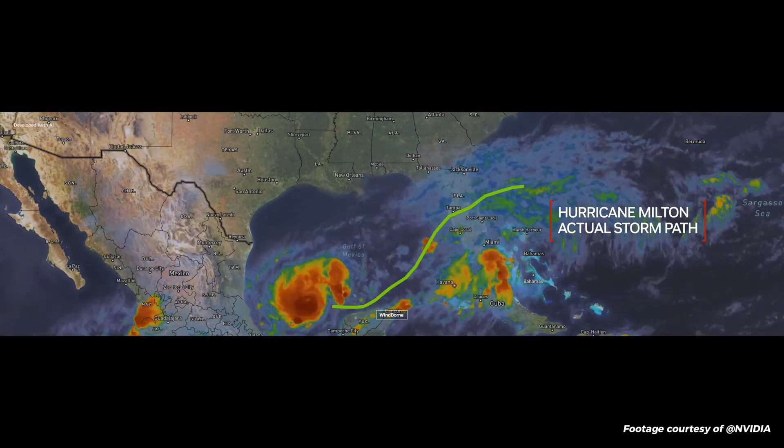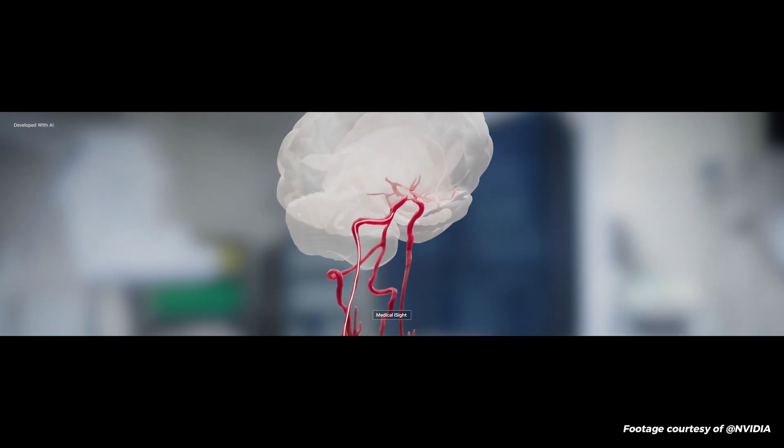Tokens can bring our visions to life. And restore what we've lost. Zachary, I got my voice back, buddy. They help us move forward. One small step at a time. And one giant leap. Together. And here is where it all begins.

That was pretty remarkable, right? Nvidia have their hands on pretty much all aspects of our life. They worked on autonomous driving with Tesla and other companies. They also work in healthcare, weather predictions, hurricane predictions, and also companion robots and robotic arms that can cook for us. Everything involves Nvidia.

For business owners and entrepreneurs, what do we care about? We care about optimization, our workflow. We care about revenue growth. So what's better than an AI agent to help us do that, right? 2022 was the first time that the world saw ChatGPT and knew what it can do. Then 2023 was the year that AI exploded. I remember about 300 to 400 tools that came out every single month. Everything on my Twitter feed was about a new tool with AI infused, AI powered.

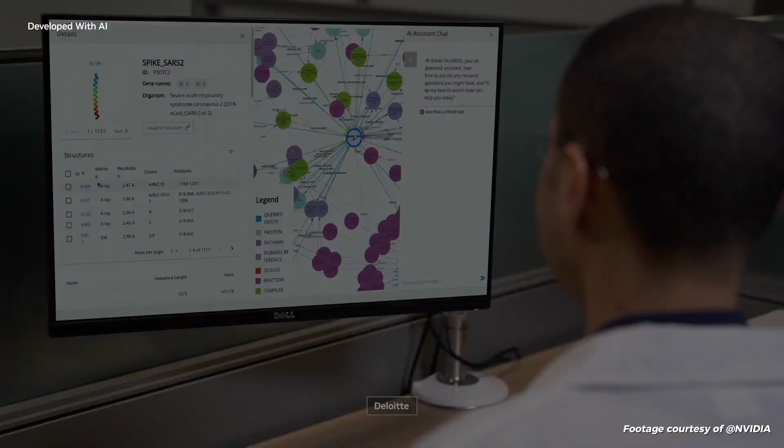Virtual Lab AI agents help researchers design and screen billions of compounds to find promising drug candidates faster than ever. And video analytics AI agents, built on an NVIDIA Metropolis blueprint, including NVIDIA Cosmos Nemotron vision language models, Llama Nemotron LLMs, and NeMo Retriever. Metropolis agents analyze content from the billions of cameras generating 100,000 petabytes of video per day. They enable interactive search, summarization, and automated reporting,

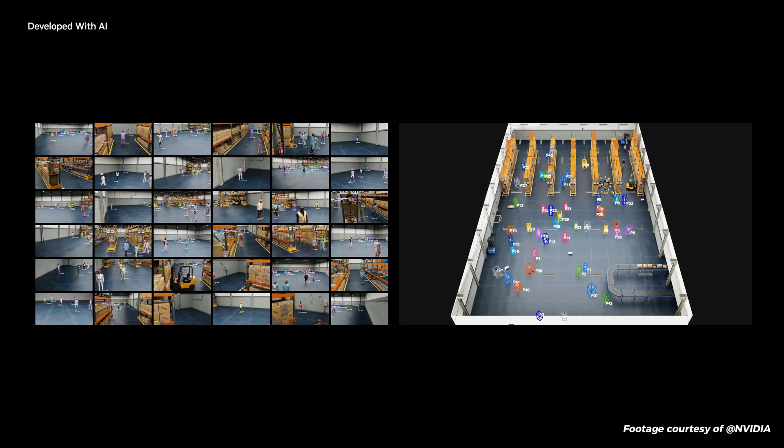and help monitor traffic flows, flagging congestion or danger. In industrial facilities, they monitor processes and generate recommendations for improvement. Metropolis agents centralize data from hundreds of cameras and can reroute workers or robots when incidents occur. The age of agentic AI is here, for every organization.

Okay. That was the first pitch at a baseball game. That was not generated. I just felt that none of you were impressed.

Okay, so AI was created in the cloud and for the cloud. And for enjoying AI on phones, of course, it's perfect. Very, very soon, we're going to have a continuous AI that's going to be with you. And when you use those Meta glasses, you could, of course, point at something, look at something, and ask it whatever information you want. And so AI is perfect in the cloud. It was created in the cloud, is perfect in the cloud.

I know what you may be thinking. The people who are knowledge workers, people who work in corporate America, they are in danger. The reason is because, as you just saw, when you apply an agentic AI workflow like the one from NVIDIA and you combine it with a model that can reason like ChatGPT o1, the agents become so powerful and they can perform tasks. They can do better work than a lot of us. And the crazy thing is, they don't sleep, they don't need to eat, they don't take sick days.

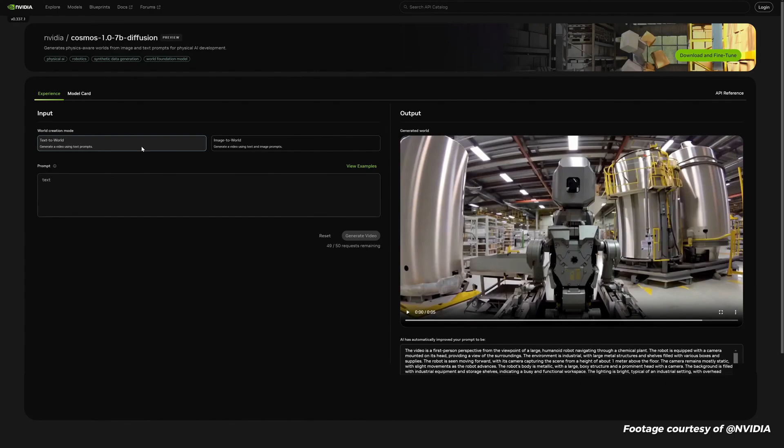The next frontier of AI is physical AI. Model performance is directly related to data availability, but physical world data is costly to capture, curate, and label. Nvidia Cosmos is a world foundation model development platform to advance physical AI. It includes auto-regressive world foundation models, diffusion-based world foundation models, advanced tokenizers, and an Nvidia CUDA AI-accelerated data pipeline. Cosmos models ingest text, image, or video prompts and generate virtual world states as videos. Cosmos generations prioritize the unique requirements of AV and robotics use cases, like real-world environments, lighting, and object permanence.

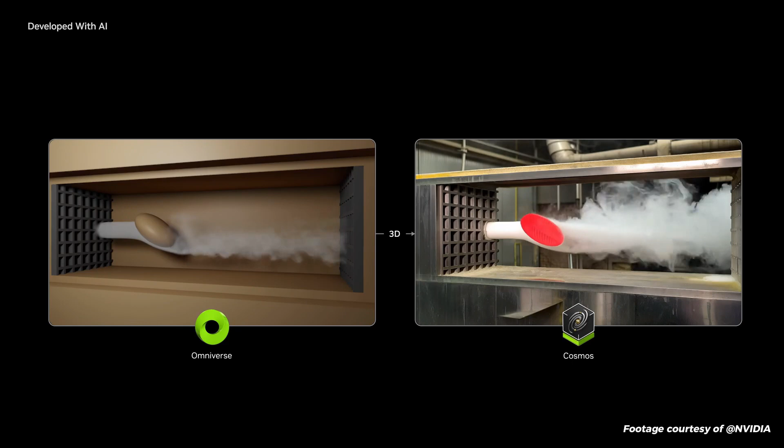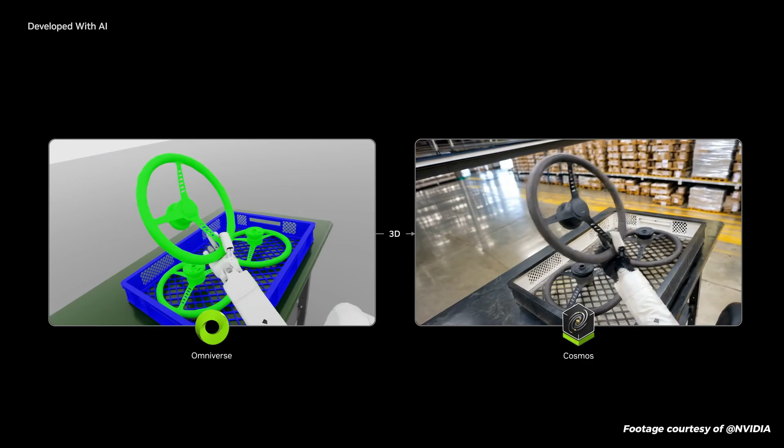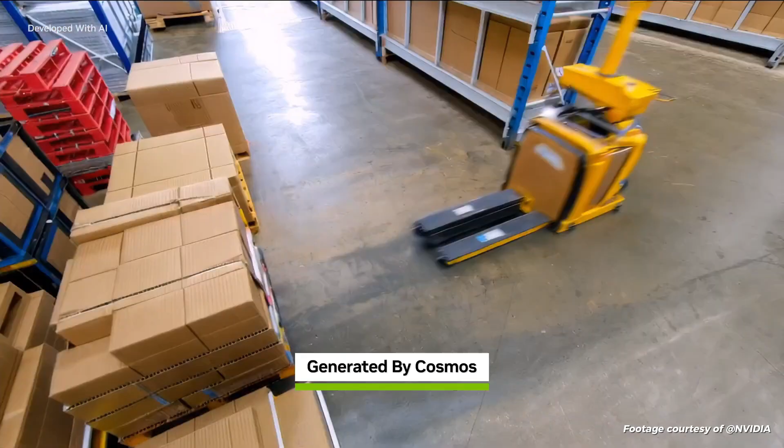Developers use Nvidia Omniverse to build physics-based, geospatially accurate scenarios, then output Omniverse renders into Cosmos, which generates photoreal, physically based synthetic data. Whether diverse objects or environments, conditions like weather or time of day, or edge case scenarios. Developers use Cosmos to generate worlds for reinforcement learning AI feedback to improve policy models, or to test and validate model performance. Even across multi-sensor views, Cosmos can generate tokens in real time, bringing the power of foresight and multiverse simulation to AI models, generating every possible future to help the model select the right path. Working with the world's developer ecosystem, Nvidia is helping advance the next wave of physical AI. Nvidia Cosmos.

Nvidia Cosmos. Now that you have seen Nvidia's Cosmos, how they actually create synthetic data to train physical AI, now let's take a look at the fun part. How people are actually using Cosmos in the real world, in the physical AI robotic world.

With this physical AI, there are many downstream things that we could do as a result. We could do synthetic data generation to train models. We could distill it and turn it into effectively the beginnings of a robotics model. You could have it generate multiple physically based, physically plausible scenarios of the future, basically do a Doctor Strange.

Because this model understands the physical world, of course, you saw a whole bunch of images generated. This model understanding the physical world, it also could do, of course, captioning. And so it could take videos, caption them incredibly well, and that captioning and the video could be used to train large language models, multimodality large language models.

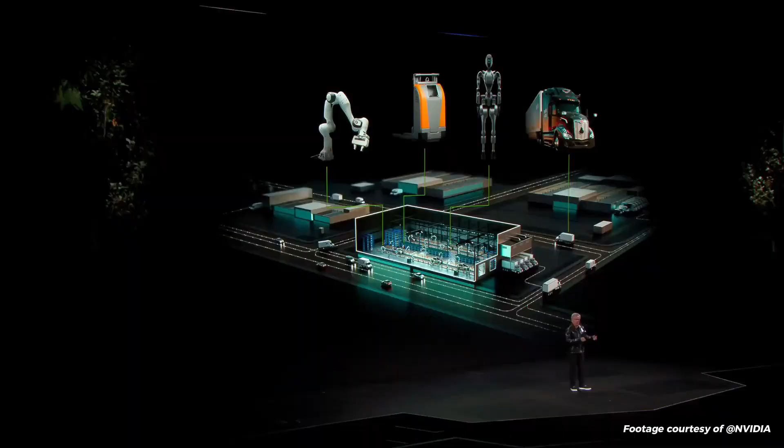All right, so the first example is how we apply all of this to industrial digitalization. There are millions of factories, hundreds of thousands of warehouses. That's basically the backbone of a $50 trillion manufacturing industry. All of that has to become software defined. All of it has to have automation in the future. And all of it will be infused with robotics.

Well, we're partnering with KION, the world's leading warehouse automation solutions provider, and Accenture, the world's largest professional services provider, and they have a big focus in digital manufacturing. And we're working together to create something that's really special. And I'll show you that in a second. But our go-to-market is essentially the same as all of the other software platforms and all the technology platforms that we have through the developers and ecosystem partners.

And we have just a growing number of ecosystem partners connecting to Omniverse. And the reason for that is very clear. Everybody wants to digitalize the future of industries. There's so much waste, so much opportunity for automation in that $50 trillion of the world's GDP. So let's take a look at that. This one example that we're doing with KION and Accenture.

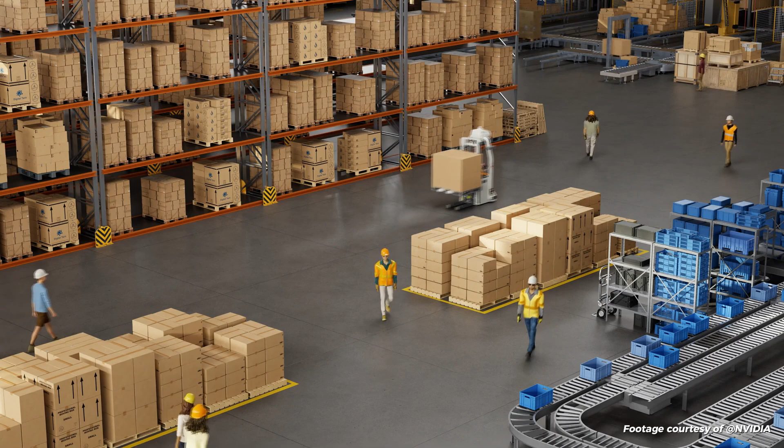Kion, the supply chain solution company, Accenture, a global leader in professional services, and Nvidia are bringing physical AI to the $1 trillion warehouse and distribution center market. Managing high-performance warehouse logistics involves navigating a complex web of decisions influenced by constantly shifting variables. These include daily and seasonal demand changes, space constraints, workforce availability, and the integration of diverse robotic and automated systems. And predicting operational KPIs of a physical warehouse is nearly impossible today.

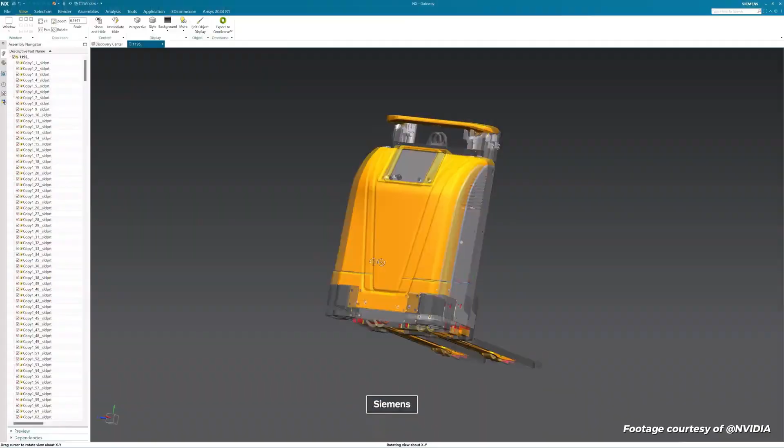To tackle these challenges, Kion is adopting Mega, an Nvidia Omniverse blueprint for building industrial digital twins to test and optimize robotic fleets. First, Kion's warehouse management solution assigns tasks to the industrial AI brains in the digital twin, such as moving a load from a buffer location to a shuttle storage solution. The robot's brains are in a simulation of a physical warehouse, digitalized into Omniverse using OpenUSD connectors to aggregate CAD, video and image to 3D, LiDAR to point cloud, and AI-generated data.

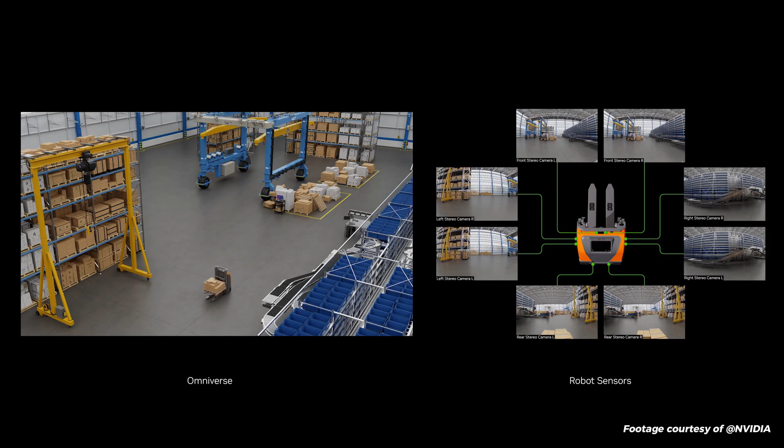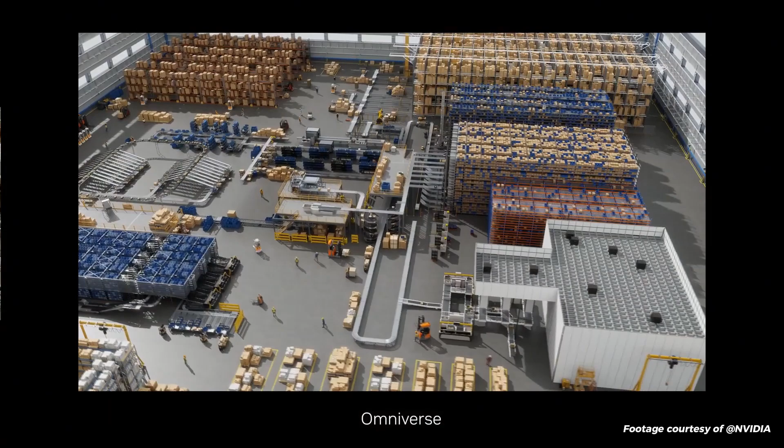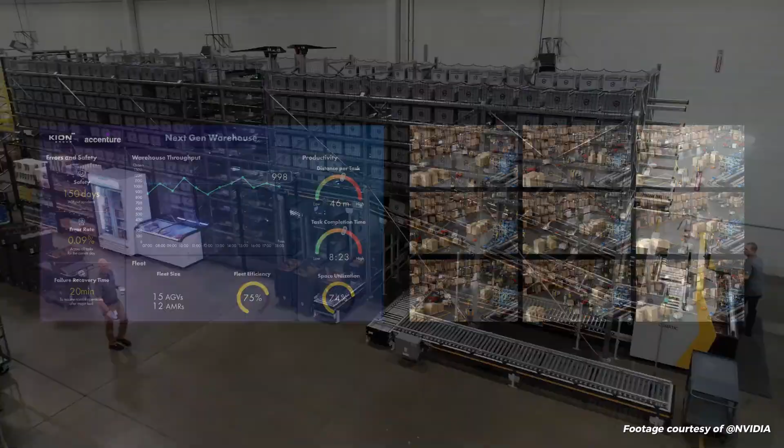The fleet of robots execute tasks by perceiving and reasoning about their Omniverse digital twin environment, planning their next motion and acting. The robot brains can see the resulting state through sensor simulations and decide their next action. The loop continues while Mega precisely tracks the state of everything in the digital twin. Now, Kion can simulate infinite scenarios at scale while measuring operational KPIs, such as throughput, efficiency, and utilization, all before deploying changes to the physical warehouse. Together with Nvidia, Kion and Accenture are reinventing industrial autonomy.

So that's how Nvidia is using physical AI to tackle automation and robotics in the manufacturing and warehouse industries. Like you heard Jensen Huang say, it's a $50 trillion, with a T, manufacturing industry. And they're using their system to train robots, to create synthetic data, and then use that data to train large language models. It's just fascinating the things that they are doing right now at Nvidia.

Now, for a small business owner and entrepreneur, how does this really apply to you? Just like ChatGPT when they first came out, if you wanted to use the API, it was really expensive. Even before ChatGPT came out, Jasper AI was really expensive. It was using GPT-3. And then eventually, when they have more computing power, more training, it's cheaper and cheaper to use their API.

Now take that and turn it to the physical AI world, right? Right now, maybe it's still early, it's expensive, but eventually, if you have a small warehouse and you're doing e-commerce, maybe you can have some of these robots working for you autonomously. Just imagine that, right? In the industrial setting. Or like Tesla's Humanoid. This is a good time to transition over and talk about robotics.

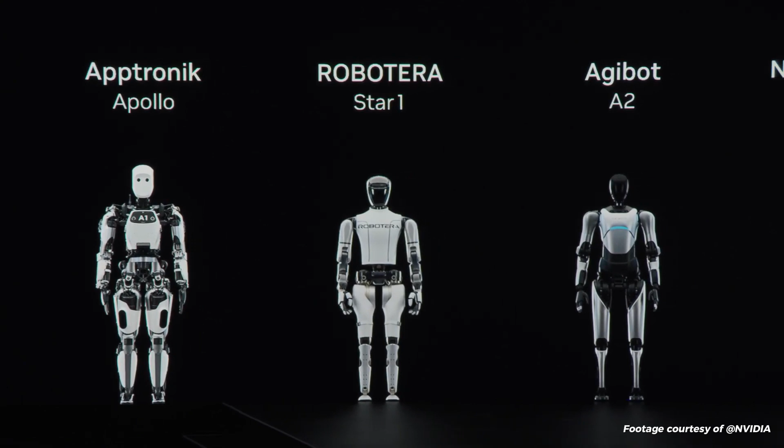Humanoid robots. My friends, the ChatGPT moment for general robotics is just around the corner. And in fact, all of the enabling technologies that I've been talking about is going to make it possible for us in the next several years to see very rapid breakthroughs, surprising breakthroughs in general robotics. Now, the reason why general robotics is so important is whereas robots with tracks and wheels require special environments to accommodate them, there are three robots in the world that we can make that require no green fields. Brownfield adaptation is perfect. If we could possibly build these amazing robots, we could deploy them in exactly the world that we've built for ourselves.

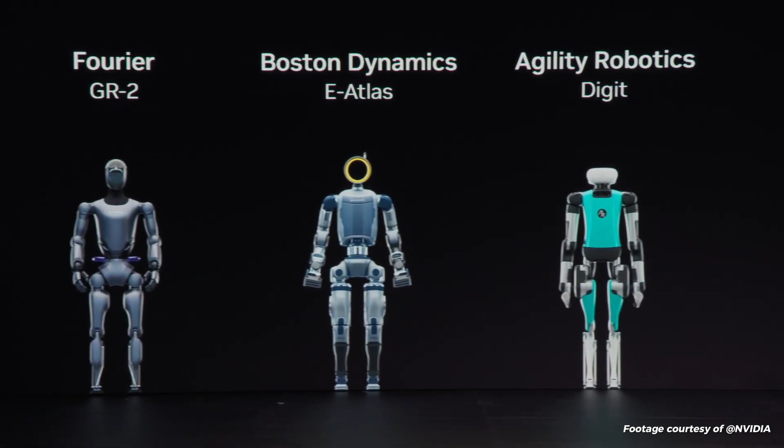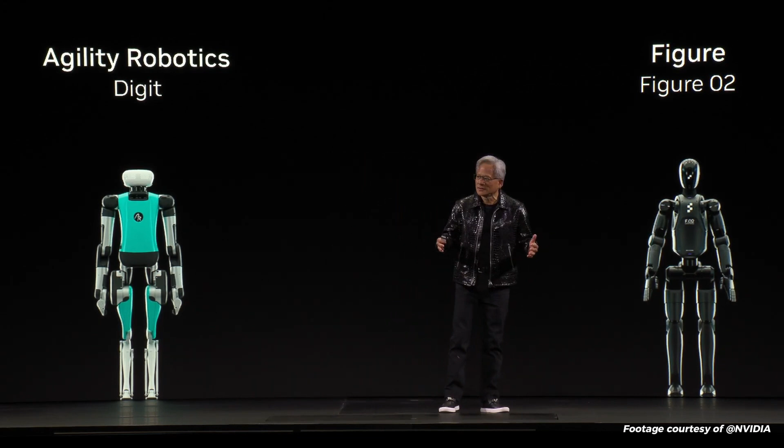These three robots are, one, agentic robots and agentic AI, because they're information workers. So long as they could accommodate the computers that we have in our offices, it's going to be great. Number two, self-driving cars. And the reason for that is we spent 100 plus years building roads and cities. And then number three, humanoid robots. If we have the technology to solve these three, this will be the largest technology industry the world's ever seen. And so we think that the robotics era is just around the corner. The critical capability is how to train these robots.

In the case of humanoid robots, the imitation information is rather hard to collect. And the reason for that is, in the case of car, you just drive it. We're driving cars all the time. In the case of these humanoid robots, the imitation information, the human demonstration is rather laborious to do. And so we need to come up with a clever way to take hundreds of demonstrations, thousands of human demonstrations, and somehow use artificial intelligence and Omniverse to synthetically generate millions of synthetically generated motions. And from those motions, the AI can learn how to perform a task. Let me show you how that's done.

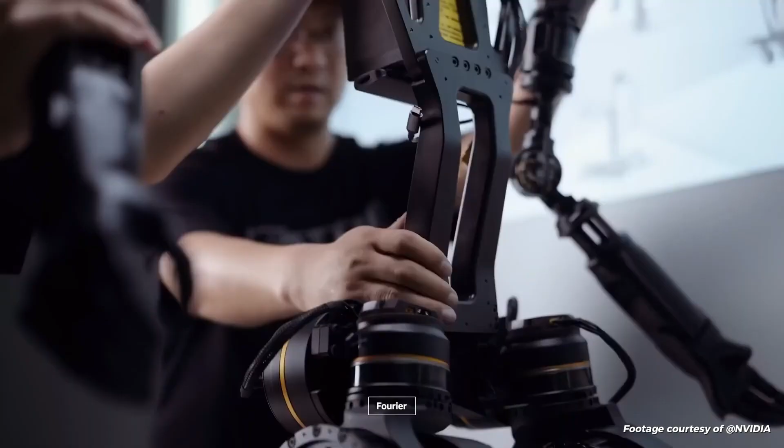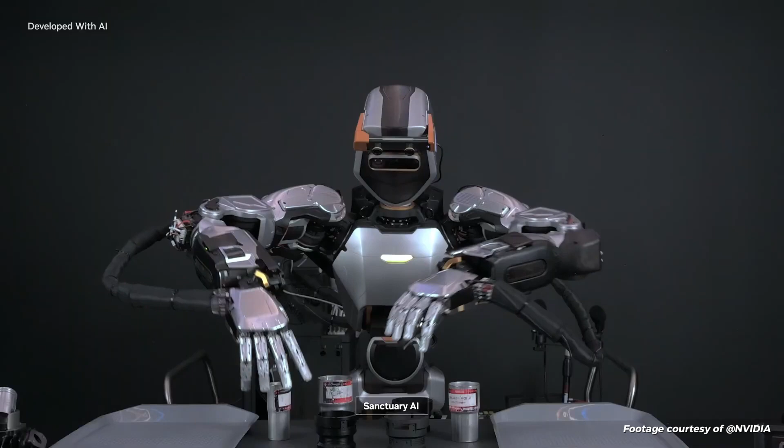Developers around the world are building the next wave of physical, AI-embodied robots, humanoids. Developing general-purpose robot models requires massive amounts of real-world data, which is costly to capture and curate. Nvidia Isaac GR00T helps tackle these challenges, providing humanoid robot developers with four things: robot foundation models, data pipelines, simulation frameworks, and a Thor robotics computer.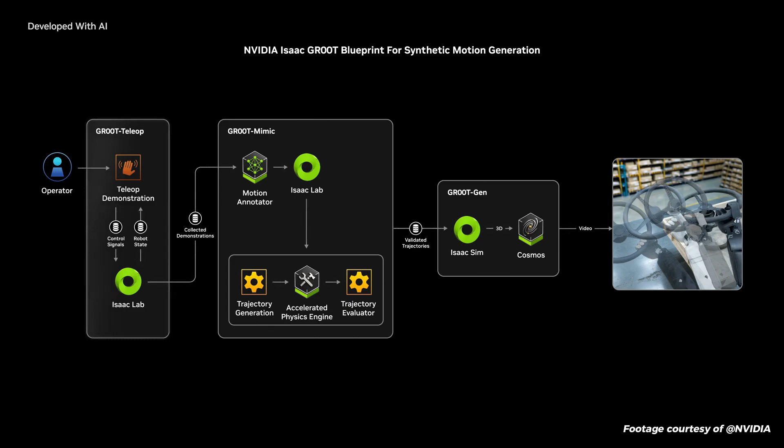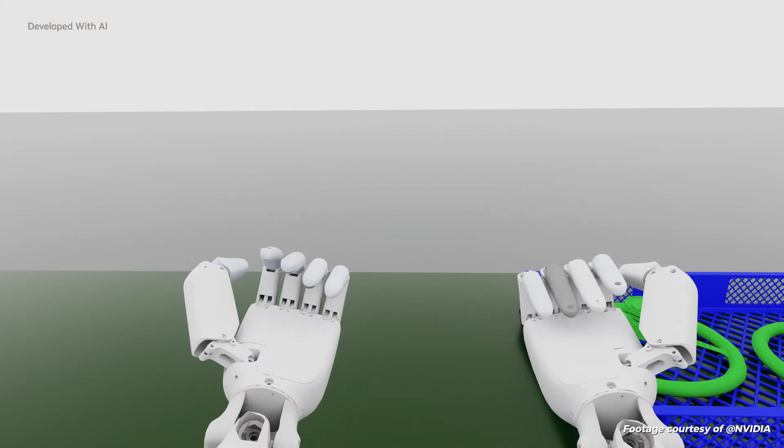The Nvidia Isaac GR00T blueprint for synthetic motion generation is a simulation workflow for imitation learning, enabling developers to generate exponentially large datasets from a small number of human demonstrations. First, GR00T Teleop enables skilled human workers to portal into a digital twin of their robot using the Apple Vision Pro. This means operators can capture data even without a physical robot, and they can operate the robot in a risk-free environment, eliminating the chance of physical damage or wear and tear.

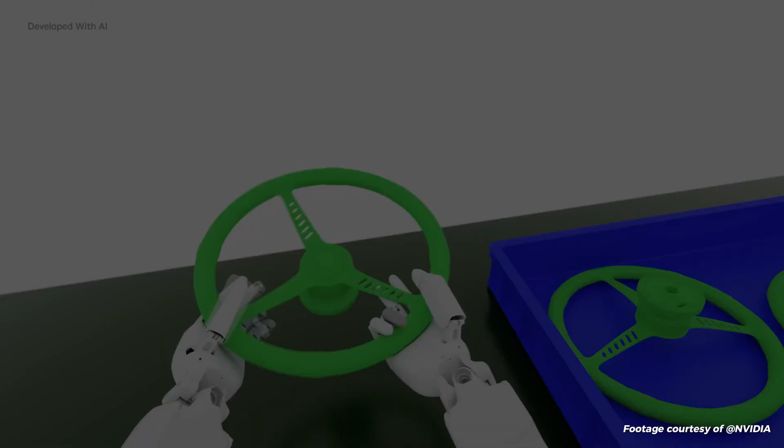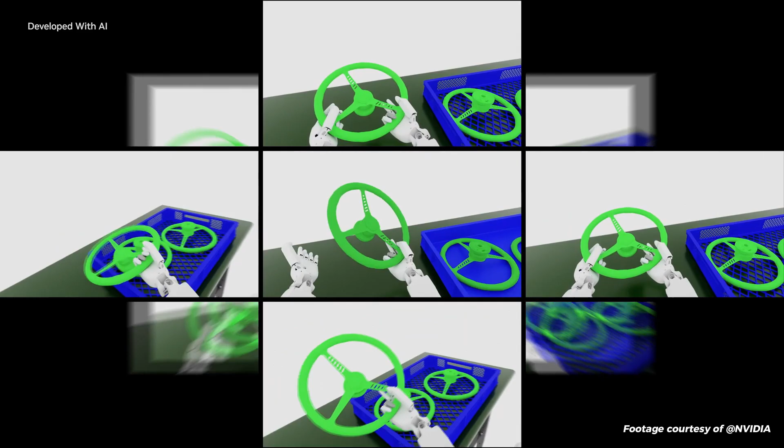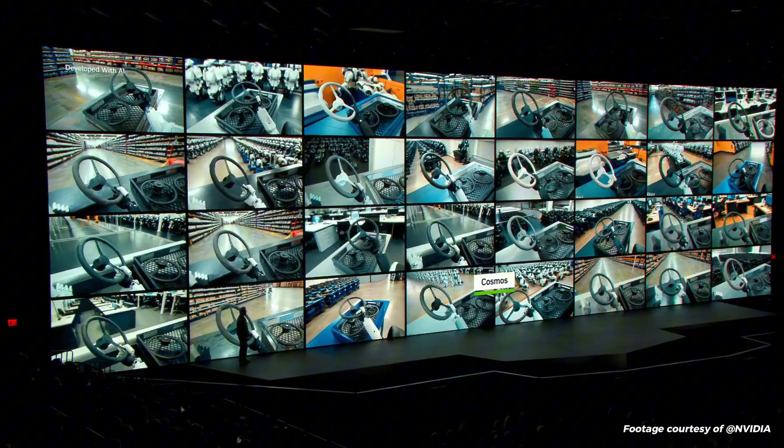To teach a robot a single task, operators capture motion trajectories through a handful of teleoperated demonstrations, then use GR00T Mimic to multiply these trajectories into a much larger dataset. Next, they use GR00T Gen, built on Omniverse and Cosmos, for domain randomization and 3D to real upscaling, generating an exponentially larger dataset. The Omniverse and Cosmos multiverse simulation engine provides a massively scaled dataset to train the robot policy.

Once the policy is trained, developers can perform software-in-the-loop testing and validation in Isaac Sim before deploying to the real robot. The age of general robotics is arriving, powered by Nvidia Isaac GR00T.

I am just so excited, so pumped up for the year 2025, just because of all of these AI-enabled technologies. You saw that they were able to train a humanoid with data synthetically generated by Nvidia's program, and then use Apple Vision Pro to start training it. You no longer have to have the physical product for someone to actually go and perform the task.

All you need is, just like in that video, some data, and then you have Vision Pro, some augmented reality glasses, so you can start training your humanoid robots. So it's making it easier for all of these companies to train their robots on different human tasks.

Let's transition to something that applies more to us, immediately to us, which is AI in a box. You're gonna hear Jensen Huang say that in 2016, he delivered this first supercomputer to Elon Musk, Sam Altman, and OpenAI. Now, all of these years later, in 2025, we are now able to get our hands on that exact same computer, only much smaller and much better. It's an improved version of the supercomputer that started OpenAI.

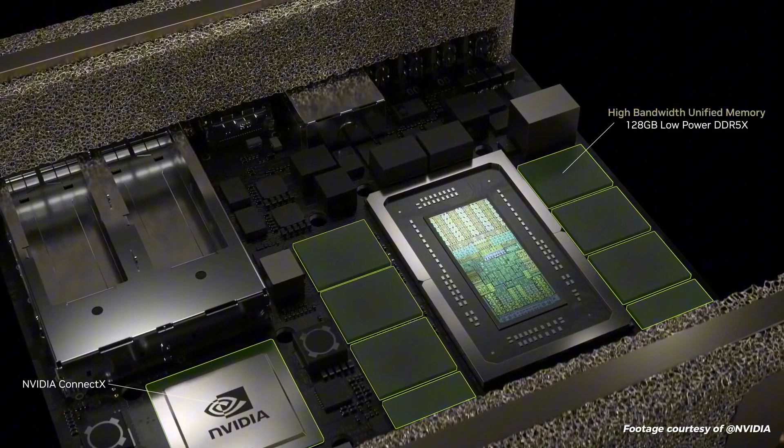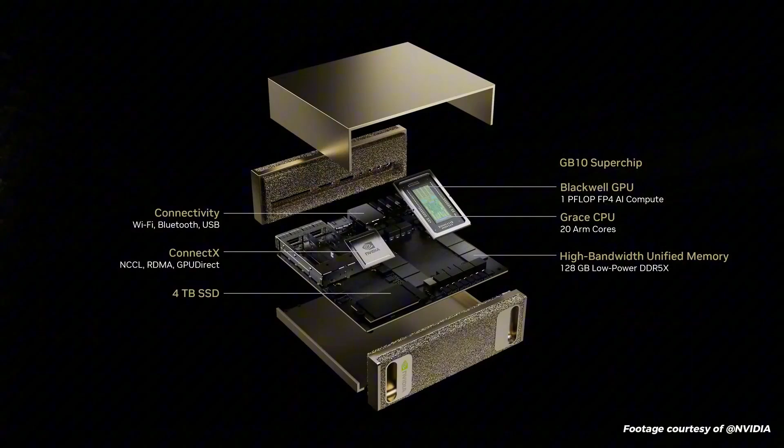It's just so cute. And this is the chip that's inside. It is in production. This top secret chip we did in collaboration. The CPU, the Grace CPU, is built for NVIDIA in collaboration with MediaTek. They're the world's leading SoC company. And they worked with us to build this CPU SoC, and connect it with chip-to-chip NVLink to the Blackwell GPU. And this little thing here is in full production. We're expecting this computer to be available around May timeframe. And so it's coming at you.

It's just incredible what we could do. I was trying to figure out, do I need more hands or more pockets? All right, so imagine this is what it looks like. You know, who doesn't want one of those? And if you use PC, Mac, anything, because it's a cloud platform. It's a cloud computing platform that sits on your desk. You could also use it as a Linux workstation if you like.

If you would like to have double Digits, this is what it looks like. You connect it together with ConnectX, and it has NCCL, GPUDirect, all of that out of the box. It's like a supercomputer. Our entire supercomputing stack is available. And so, NVIDIA Project Digits. A tiny computer that allows us to run a 200 billion parameter LLM system right at our local office.

Pretty amazing. Now, 200 billion parameters is about half of the latest open source model from Meta AI. It's about 405 billion parameters, and Nvidia, this is half that. We're living in the best time of our life right now.